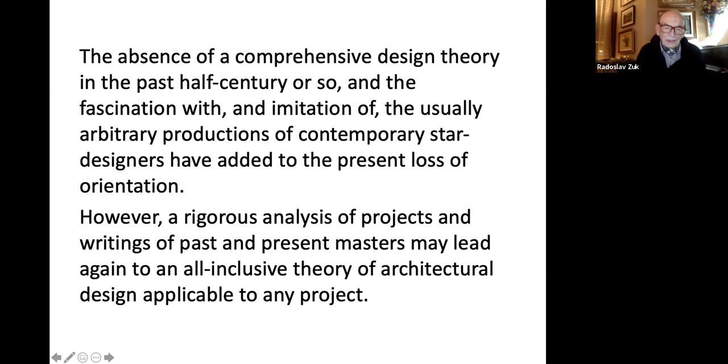A comprehensive design structure, Image, Organization, and 9 Systems of Built Form, has served for a number of years as a guide in my own design practice and teaching, constantly evolving and based on a variety of studies, observations, and experimentations. It allows for the application of relevant research to a wide range of the component design considerations, from the most poetic to the most pragmatic.

The conceptual design structure—image, organization, and built form—is used as a scheme to organize the design, and it can be examined by research of existing projects, as mentioned. The general configuration, character, and meaning of the built form are determined by an appropriate image and organization derived from the cultural, physical, and programmatic context of a project.

Image may be seen as containing three principal aspects: idea, or parti, for the physical structuring of the project community; experience, or appearance of the project as an object in the landscape and of its spaces; and symbol, the meaning of cultural, geographic, and functional context of the project.

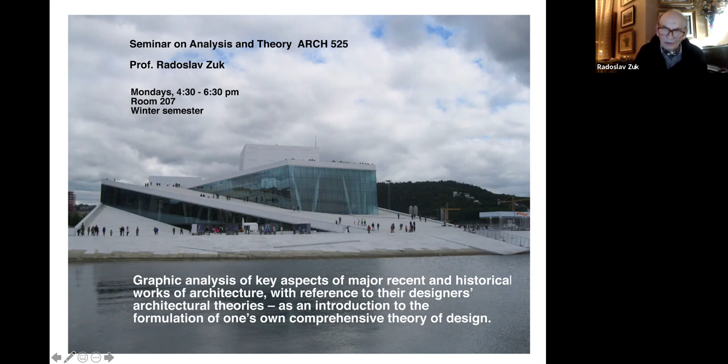An example of such an analysis of Le Corbusier's La Tourette Monastery by Marie Orangi. It starts with a presentation of the external appearance of the building, followed by general considerations of Le Corbusier's theories. Here what should be noted is that in the right-hand column there is usually in bold the investigator's understanding of what is involved, followed by a smaller font of quotations and references to literature.

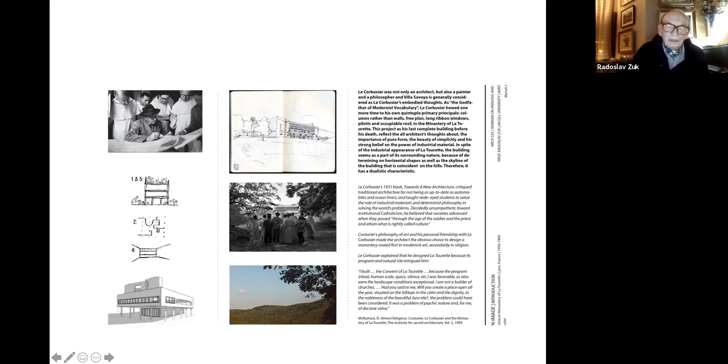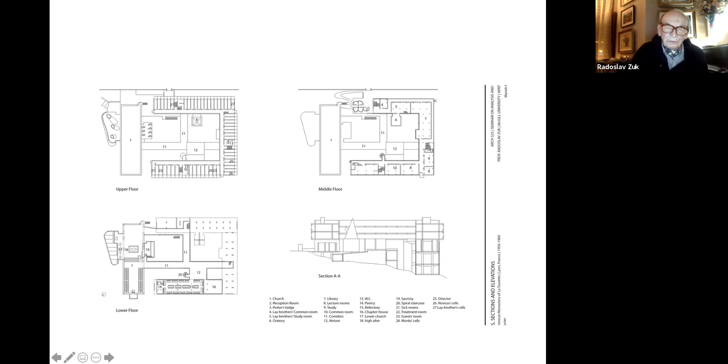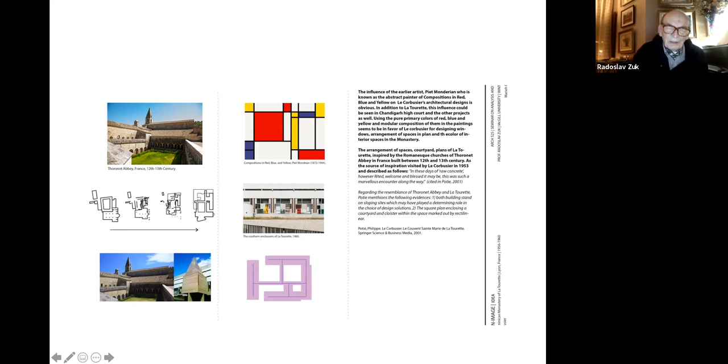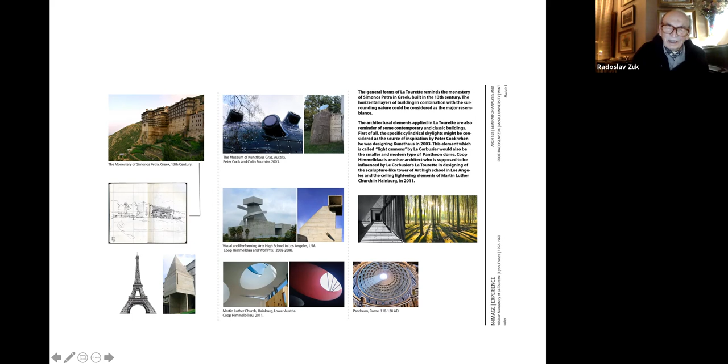The presentation includes plans and sections of the project, and then the three presentations of the three image components: idea, which may be a reference to precedents, maybe to a composition by an artist, which then suggests the general overall structuring of the main elements of the building. Experience shows the appearance of the building, or possible similar appearances which might have influenced this particular project, or in the case of design, would influence the designer, both of the building in the landscape and also the appearance of the major interior spaces. And symbol are the elements within the building, its overall structuring, its particular details, colors, materials, technology used, which are expressive of the time and place and purpose of the building.

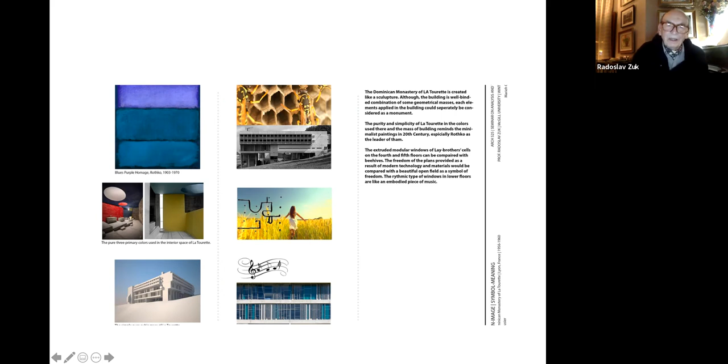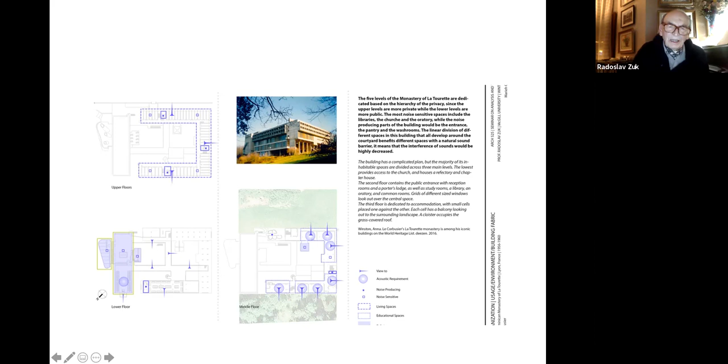The organization deals with the position of the main functional parts of a building with respect to each other and to the external landscape. Then the nine systems are examined on whether they have the coherence appropriate to a system. Of course, this analysis can also be critical in every one of the systems of how the architect achieved or did not achieve the desired ideal system coherence.

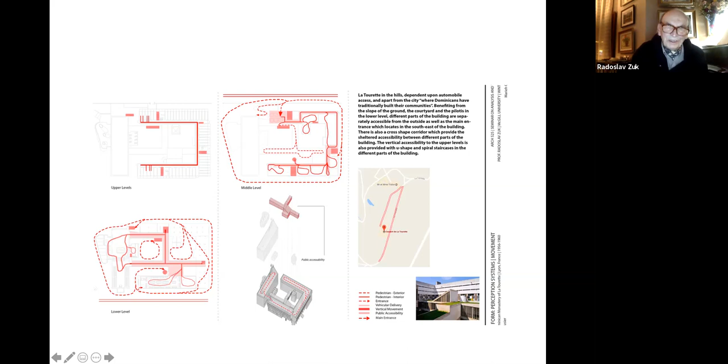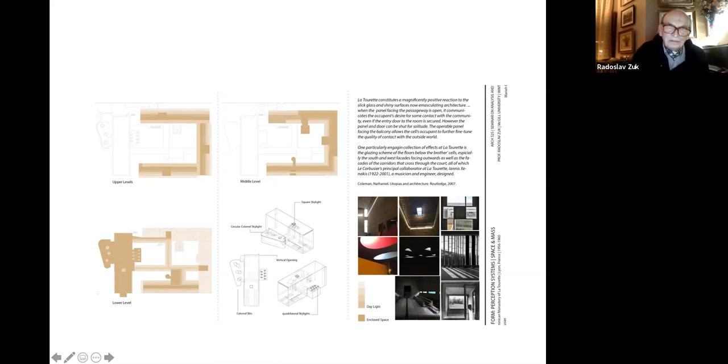Movement, grouping of space types, potential for growth and change, minimal in this case, but still there may be some places where it could be achieved. The building as sculpture, space and mass, the relationship of light and configuration. Geometry, the central and most important element in structuring, in an abstract sense, work of art or architecture.

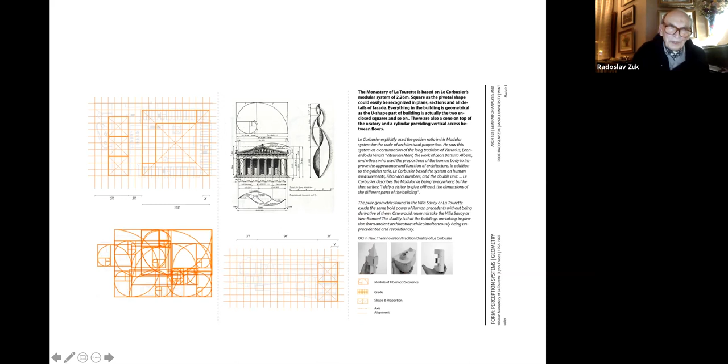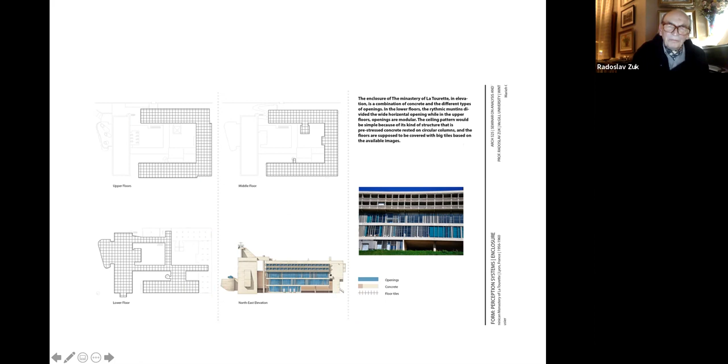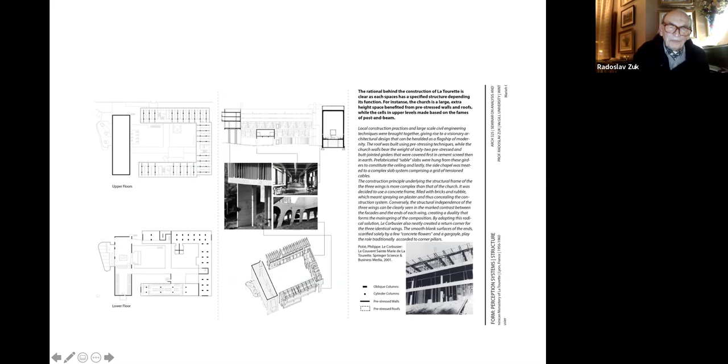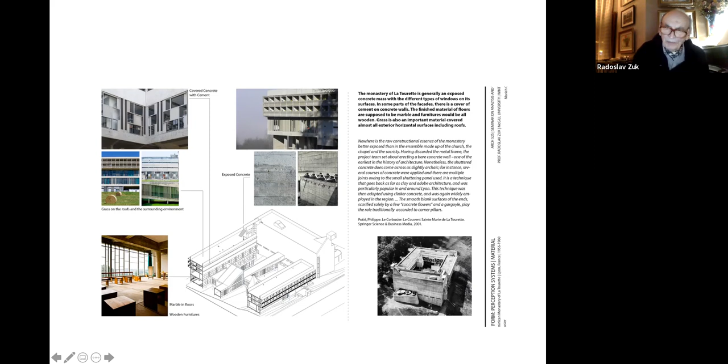Enclosure, the vertical surface patterns of elevations, the ceilings and the floor patterns, if there are visible. The services or the distribution of air and heat, sometimes it has to be conjectured and assumed. The structural system and the material systems, the relationships of various materials that meet in intersections with the ground, with adjacent floors or building elements, followed by conclusions and a bibliography.

The design studies of a given program, to see the application of the systems.

The configuration is examined in a program, in this case a conference center for McGill University on its campus on the lakefront, by student Xiandi Aster Cai. What we see here is the idea that a plank of deck jutting into the water became the principal shape she used. The experience is one of water, predominantly a beach. The symbol is one of a group of interested participants in how they relate to the town and to the water, symbolic of that particular location and purpose.

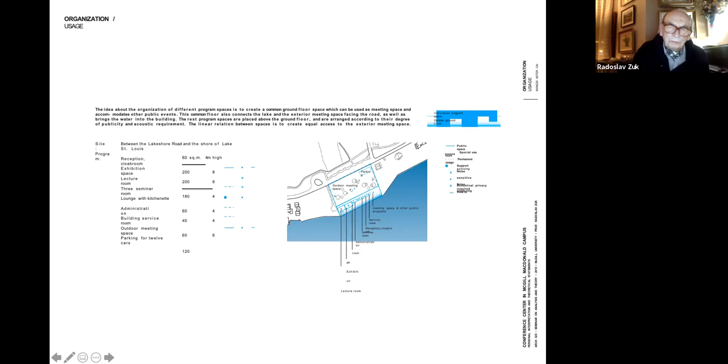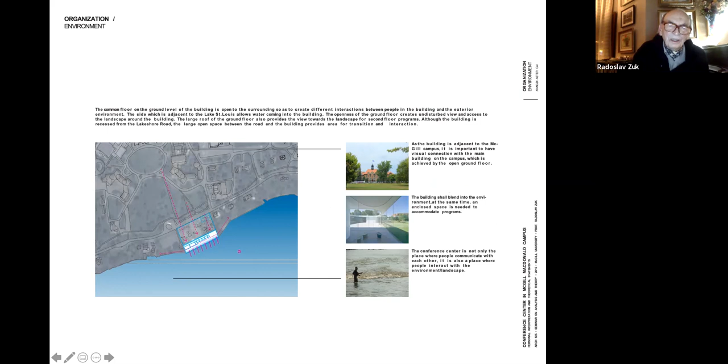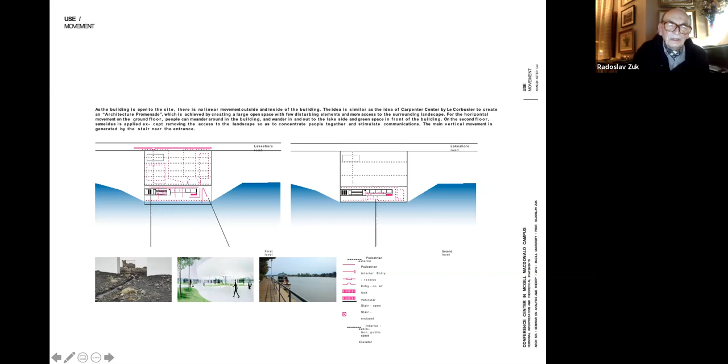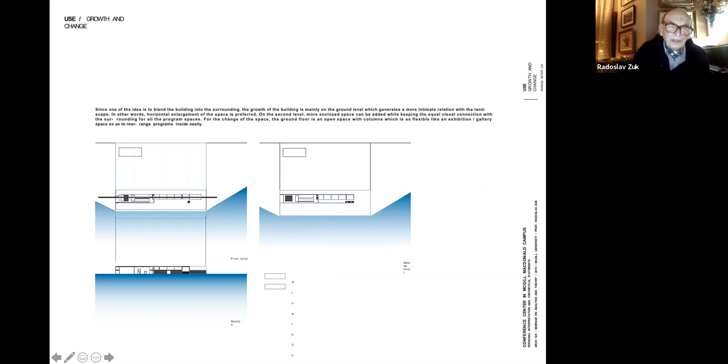The organization is a relationships diagram of the program components, shown here by the functional relationships of the program participants, the relationship to the environment, back to the campus, towards the water and along the water, and the building requirements where small elements are grouped together, separated from the large ones, in order to apply the appropriate structural and accommodation requirements. Then the proposal for movement, for the grouping of space types, for growth and change. You can see it can theoretically expand left and right.

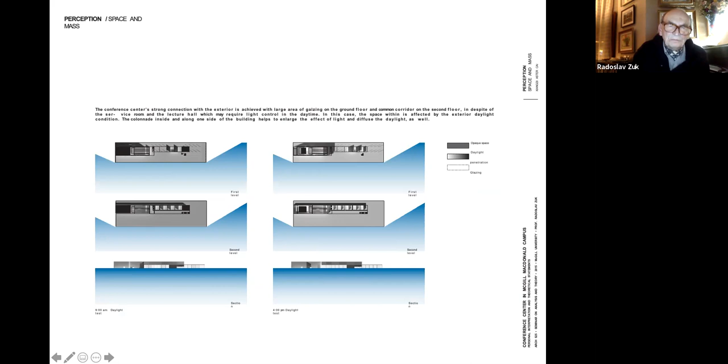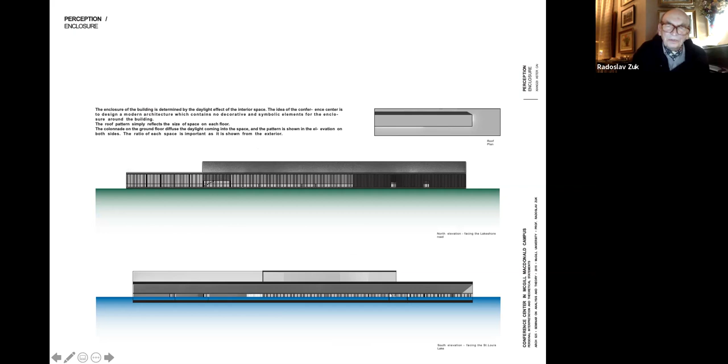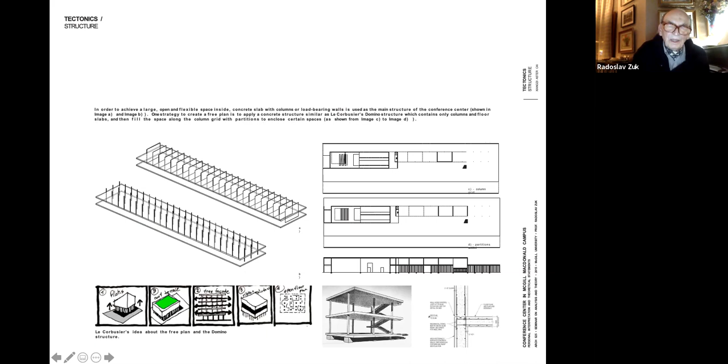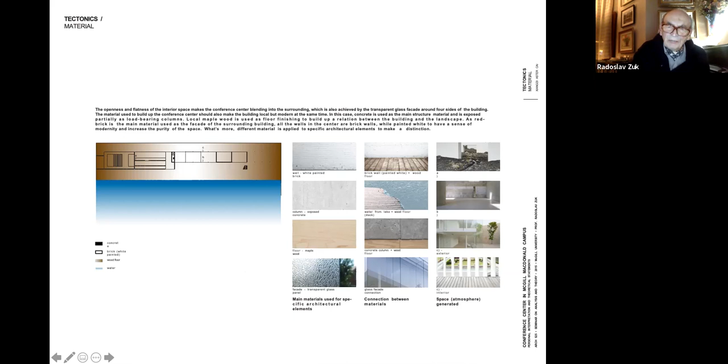Space and mass, three-dimensional configuration, geometry in terms of proportional systems for the spaces and for the entire building, the enclosure, elevations in this case, and maybe the roof surface, the services, heating and ventilation, and the structural system, and the materials, the tectonics of how materials come together and articulate the building, and bibliography.

In summer courses in Italy, which I initiated in Venice, as well as the course Architecture and Geometry, these are paralleled by research on the most abstract yet central of the nine systems: geometric structures and determinants of formal environmental quality in architecture, with special reference to comparable structures in music.

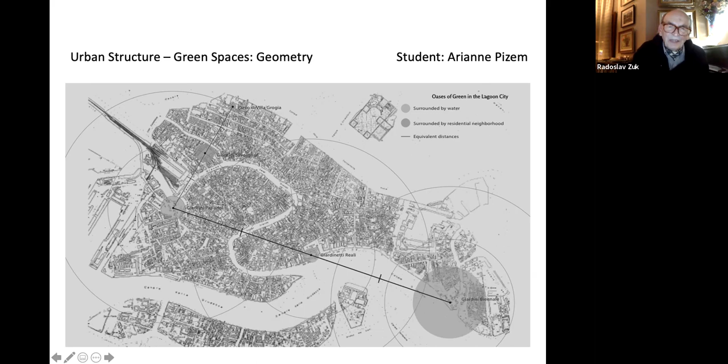Here's one example from urban structure analysis of green spaces in Venice, with the amazing straight line relationship and proportional distances of major green spaces in the lagoon city, and also their relationship to the canal and the extensions of the building.

In practice, I follow the image organization nine-system structure and have designed, among other projects, nine Ukrainian Catholic churches in North America and one in Ukraine, in association with or as consultant to a number of architectural firms. Most of the built projects have been published in the international architectural press and exhibited widely in North America and Europe, and two have received special distinctions: the Royal Architectural Institute of Canada Governor General's Medal and the State Prize of Ukraine for Architecture, respectively.

I shall now try to show in capsule form the image organization nine systems applied in the design of these projects.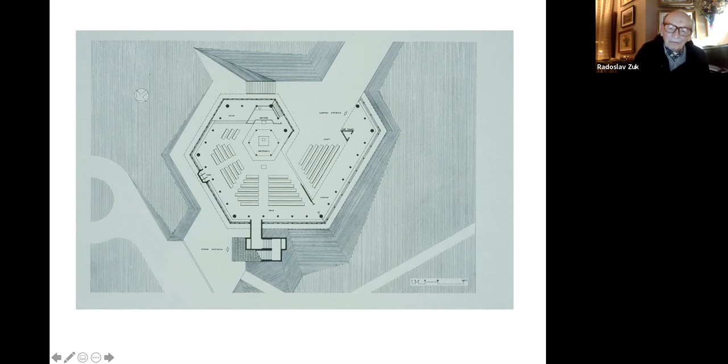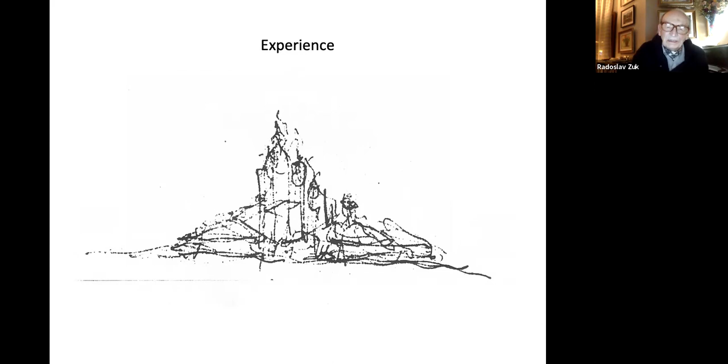The idea is one of an evolving community, perhaps the space travel of our days, in other words a reference to today. The experience is one of a building in the forest with pronounced vertical articulation, as seen in this vernacular church in Ukraine.

The symbol is of the geographic setting, the forest, of available materials, wood, and of the characteristic configuration or rhythmic pattern of Ukrainian churches throughout history. As we can see here: the vernacular building I just showed you in the upper left, then on the right a Renaissance building, on the left a Byzantine building, and more Renaissance and Baroque buildings, all following a similar rhythmic structure. This is based on my research of abstract geometric structures as determinants of intrinsic cultural identity in architecture.

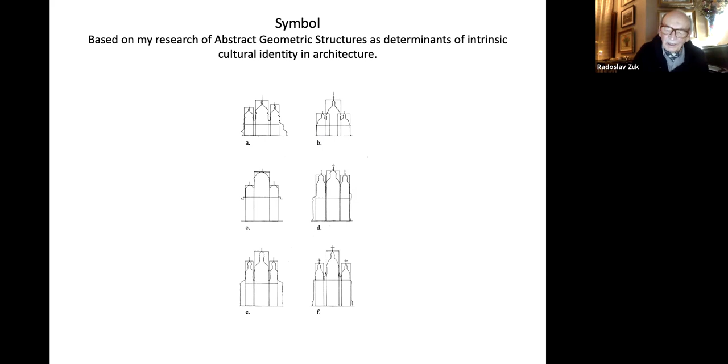I hope we're not going to lose that, because we also have here perhaps the symbol of the Holy Trinity expressed in the equilateral triangle, which evolves progressively in size from the sanctuary all around the building to the entrance from a lower level, mechanical pipe for the equipment, and then this open courtyard.

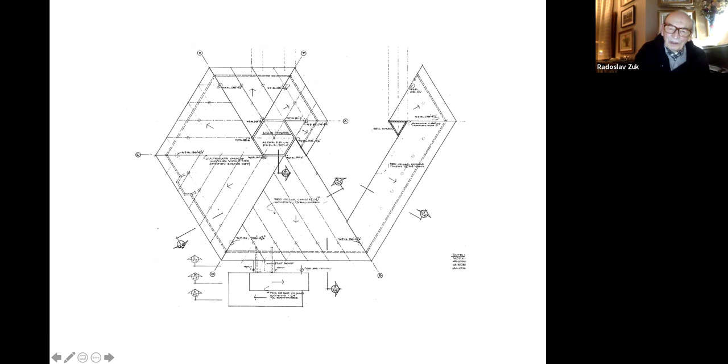A matrix was created to compare the relationships. Here we see the roof structure, which consists of beams parallel to each other providing a constant span between them, but evolving and rising due to the distance from the outer columns. These are concrete columns cantilevered from the ground, to the steel columns around the sanctuary.

Here we see the steel columns around the sanctuary, the light streaming from the tower above, and the ceiling visual above accentuating the space along the wall.

And from the outside, we see the long stretch of the colonnade, cantilevered, which defines the courtyard.

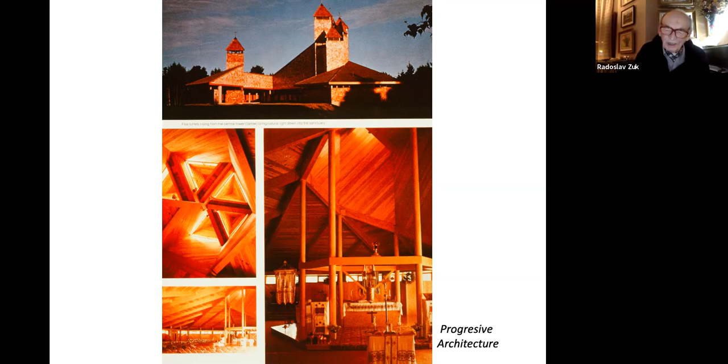The building has been published in several publications. Here I show you a summary in Progressive Architecture. In an analysis of precedent, it found its place next to Brunelleschi's Pazzi Chapel and Frank Lloyd Wright's Falling Water.

Le Corbusier's Palace of Assembly, Woodland Chapel by Asplund, and as already mentioned, the Pazzi Chapel and Falling Water, which I think is a nice neighborhood to be placed in.

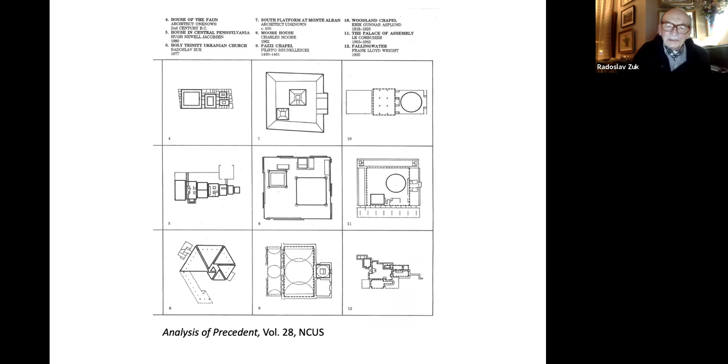As the pandemic was breaking out in London earlier this year in March, we had the opportunity to have it published, as I mentioned, in this article from Architectural Review.

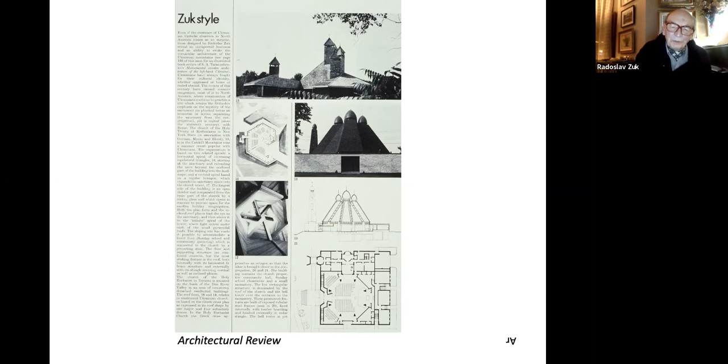It was published also together with a church in Toronto. This is the Toronto church, the Holy Eucharist Church.

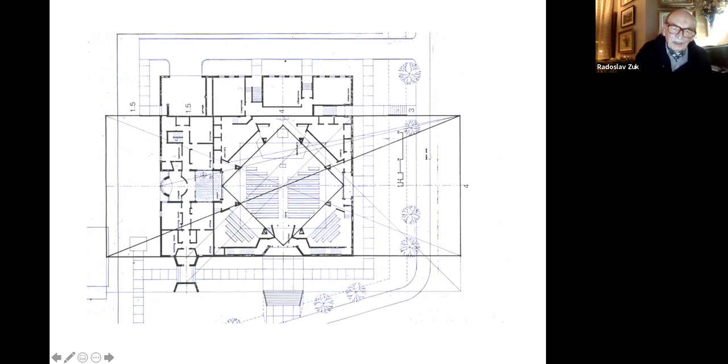Here we see the geometric scheme, based on a whole number of musical proportions of the great Renaissance theorists. It consists of the main church building, a Sunday school behind, and a small monastery, run by a monastic order, on the side under the bell tower entrance, which is placed here.

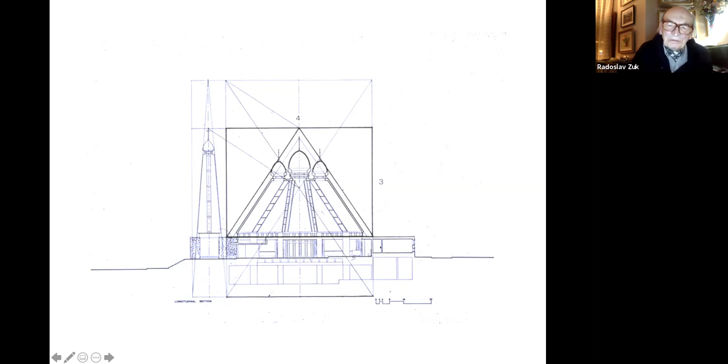A line which goes beyond the actual building element, and you can inscribe it in relationship to other elements and see that there is a sort of invisible geometric order derived from it.

In conclusion, I would like to read you a statement of my principles. Significant architecture embodies the spirit of its geographic location, the intrinsic character of the people it serves, and the most advanced ideas and technological capabilities of humanity at a given time in history.

Therefore, such architecture cannot be impersonal and sterile, nor can it be blatantly eclectic. It must maintain the substance of a specific cultural tradition, but transform it in a fresh, inventive, and relevant form.

The task then is to create an architecture which responds to a specific cultural temperament and tradition, but at the same time is expressive of the given environmental setting and of the dynamism of the contemporary world spirit.